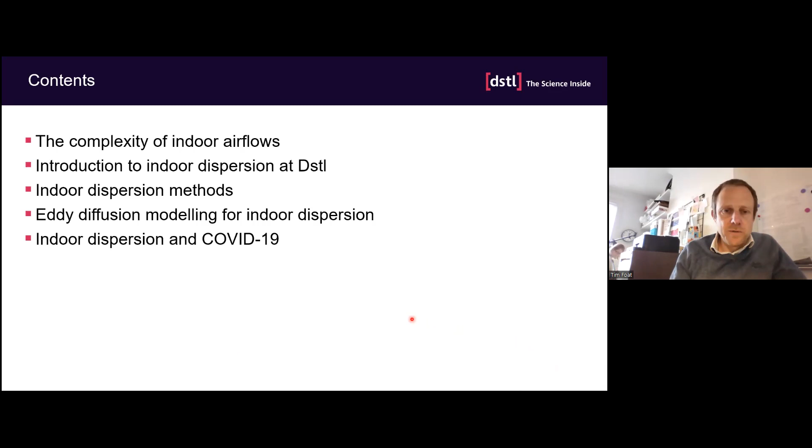So after the introduction to indoor dispersion at Dstl, I'm going to talk about the different indoor dispersion methods we use at Dstl. And then I'm going to focus on two examples. So a little bit on the eddy diffusion modelling for indoor dispersion, and then finally the second half of the talk on indoor dispersion and COVID-19. So I was going to start by explaining why indoor airflow is complex.

So indoor airflow is complex for a number of different reasons. And some of these are the flow in indoor space is often relatively weakly driven. So compared to outdoor flow, when you can have a strong dominant wind direction, often there's very weak drivers to the flow. And this could be the same in a mechanically ventilated space or a naturally ventilated space. And then second, you can have multiple flow directions. So in a naturally ventilated space, you can have two windows open, a window and a door, and you have flow coming from different directions. And even in a mechanically ventilated space, you're likely to be supplying air from a number of different directions.

And because of this weakly driven flow effect, the secondary drivers of the flow can be important, so the thermal effects can be significant. And all these factors together result in airflow that's nearly always unsteady and is typically turbulent. So I've used this little example here to try and show some of the complexity in the airflow. So this is a simple test case that was popularized by Nielsen in the 1990s, and we used it more recently to look at large eddy simulation.

So this room in our case was 9 meters long, 3 meters wide and 3 meters high. And air is supplied at the top left and is extracted at the bottom right. We had 10 air changes an hour, so the total volume of the room is refreshed 10 times every hour. And in our simulation, we released a tracer material on the bottom left part of the floor.

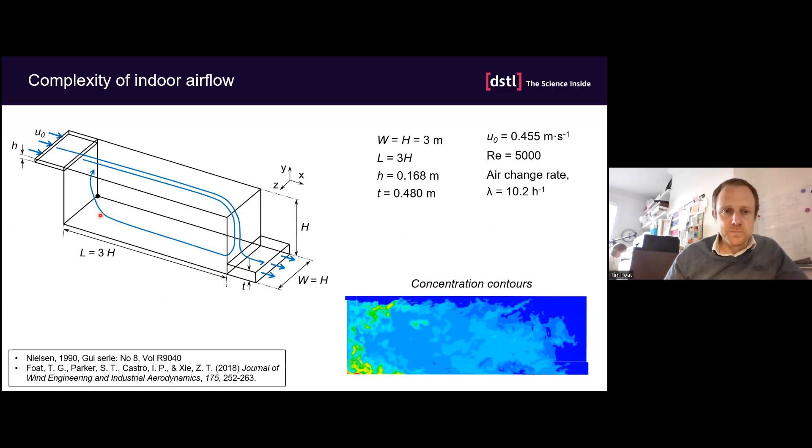So this animation shows results from our large eddy simulation CFD outputs, and it's showing normalized concentration. So the concentration is normalized to the source concentration, and this was on a vertical plane through the center of the room. So fresh air comes in here, and you can see the tracer being emitted from the source on the floor here. And this points towards some of the complexity.

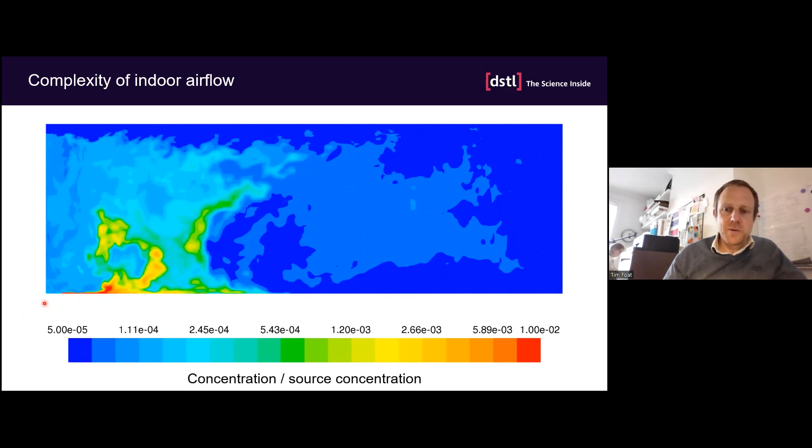So even in this case, which is actually a more simple ventilation than you get in most indoor spaces, you can see the complexity of the airflow, the turbulent airflow coming in. And the picture's even more complicated when you get the airflow dispersing the trace material that's on the floor. So it's hard to both measure and predict the complex behaviour that we see in these types of spaces. But one question to consider is, do we actually need to worry about this complexity, or can we simplify the problem? And quite often the answer to that question is yes.

So looking at another example now to point towards complexity, this was an experiment we did some years ago where we had a reasonably complex room. It was about 25 meters long. We released a tracer gas where this cross is shown here. This was released for 20 seconds. You can see the ventilation. There's vents running along the two sides of the ceiling. These are supply vents, and air is extracted from the back of the room. It's a reasonably low ventilation rate in this room, so it was about 4 air changes an hour. So the total volume of air is exchanged once every 15 minutes.

And what I'm showing here is the concentration measured at these 26 different gas sensors and how this changes with time. So you can see the first part of the experiment, up to 10 minutes, you end up with this very complex behavior. So regions of high concentration, low concentration, rapid changes. But then as you move to the later period, even though this room is complex and the airflow is complex, it tends towards a mixed state. So after 10 or so minutes, around about 1 air change in this case, you end up with reasonably uniform concentrations across the space.

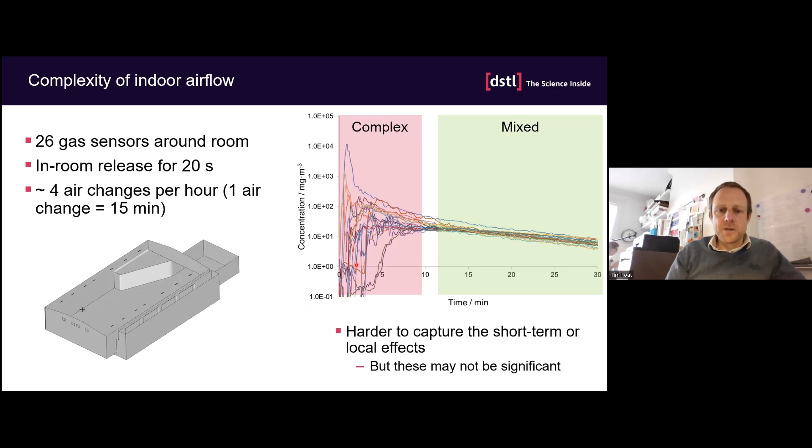So this early period is complex. So you can consider the airflow is complex either at early times or close to the source. So even at the mixed stage, if you had a continuous source, you can still end up with complex behavior close to the source. So it's harder to capture these short-term local effects, but it may be that these aren't significant depending on what the problem is you're trying to tackle.

So now looking a bit at indoor dispersion at Dstl. So we're primarily interested in the hazard from chemical and biological agents. And we're interested in buildings because these can be targets for terrorists, and people are confined within the space, and there's a lot less dilution than there is in the outside environment. So we're often required to understand the impacts of hazardous airborne material on indoor environments, to assess the risk and to figure out how we could protect the occupants.

And the things we're typically interested in are those short-term deliberate releases or accidental releases. The release could be in the indoor space, or it could be outdoors and be transferred to the indoor space. We're interested in gas and vapor materials and also the aerosol phase. And we typically look at the time-dependent concentration or the integrated dose. And as well as these chemical and biological agents, we're also interested in vapor transport for detection of explosives.

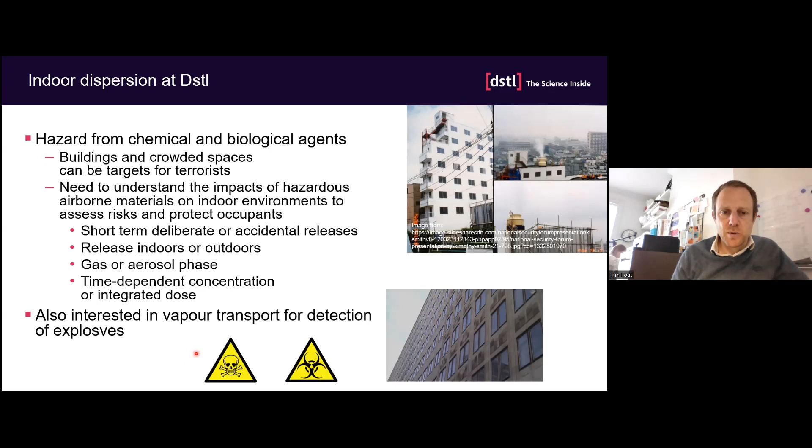So the environments we're interested in, we're interested in everything really from small-scale systems to complex networks. Our typical interest is non-residential buildings, and we're interested in everything from room scale to whole building scale. And these show some of the examples. So a large office complex or a small meeting room or a public space. We've also had an ongoing interest in transport, and this could be everything from a single vehicle to, recently, transmission of COVID on the London Underground, and this was a project called TRACK, which is Transport Risk Assessment for COVID Knowledge.

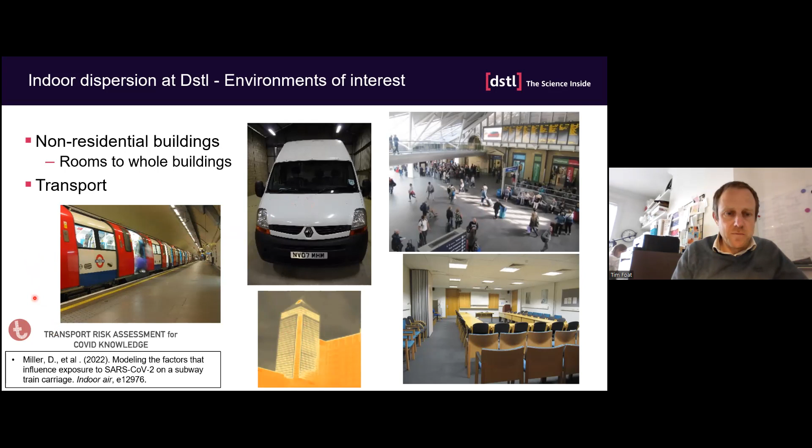So when you're thinking about indoor dispersion methods, you can split them broadly into 2 categories. So you can have specific approaches and general approaches. So the specific approaches are broadly, if you want to consider what's going on in a specific building or a specific scenario, these models are typically detailed, but they're very sensitive to change. If you change to a different scenario, a different building, you may get very different results. And it's sometimes difficult to base more general advice on this.

So the other end of the range is the more general type modelling. These models are normally coarser, but they're more robust, and these are more suitable for providing advice on. So the different indoor dispersion techniques support one or other of these approaches, or could match multiple of them.

So typically experiments or high resolution modelling, such as computational fluid dynamics modelling, are typically supporting this kind of specific advice, whereas single zone modelling and multi-zone modelling, which I'll talk about in a bit more detail shortly, typically support more of the general approach, and then other techniques span the two. So I'm going to move now through some of the different modelling methods and some experimental methods.

So the first one I'll introduce is well mixed modelling. Going back to the experiment we had before with the concentration time series, I said that even in this room, which is quite complex, after a short period of time, you end up with this kind of mixed condition. So we can apply what's called a well mixed model to this environment, which basically consists of an exponential rise in concentration followed by an exponential decay.

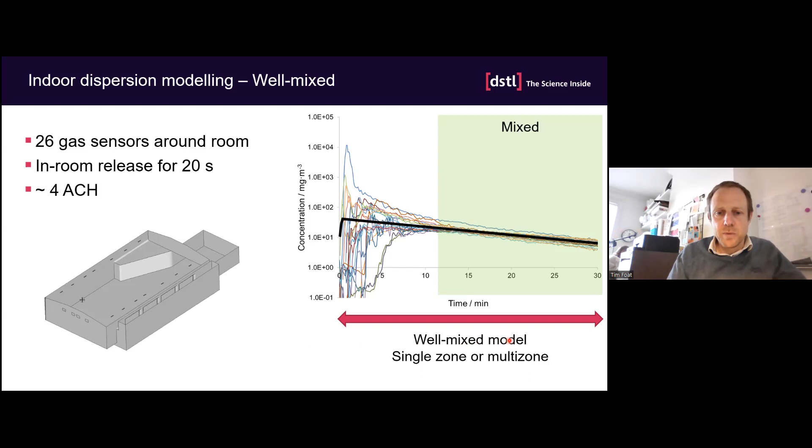This well mixed assumption can be used in a number of different techniques, and the two main ones we use are single zone modelling and multi-zone modelling. So single zone modelling, as I said, considers an average concentration in a room or even a simplified building. This is a simple representation. You just have a single volume, you have a flow rate of fresh air into the space, you've got a release rate into the space. These are the key parameters that drive this type of simple model.

You can take this to the next extent by including a ventilation system. So you could have contaminated air coming in from outside. You could perhaps have some filtration efficiency in the ventilation system, or you could have a recirculating ventilation system. And you could have loss terms, aerosol depositing to surfaces, or vapour sorbing to surfaces. We've been using these types of models for some time at Dstl, and they're very useful for carrying out rapid calculations and providing more general generic advice.

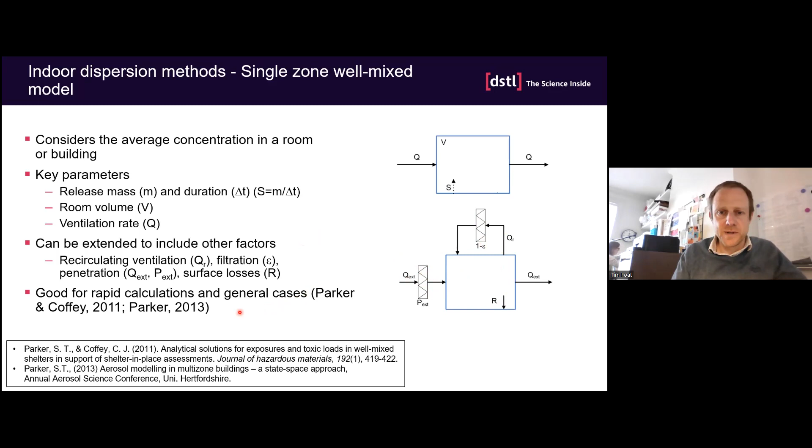Then the next level of complexity using this well mixed type of modelling is multi-zone modelling. For this, you can start looking at a whole floor of a building, or even a whole building. Here you have a number of separate well mixed spaces, and you have to define the connectivity between the different spaces. So here we've got a single storey of a building: lift shafts, the main office space, stairwells, and each one of these is a separate well mixed zone. As I say, you define the coupling between them.

You could represent a single storey of a building, or you could put these together and end up with a representation of a whole building. With multi-zone modelling, you can calculate the airflow and the dispersion. There's a number of third-party tools available, and the one we use primarily is CONTAM, which I believe was developed by NIST in the US. Extensive validation has been carried out for these techniques over the years.

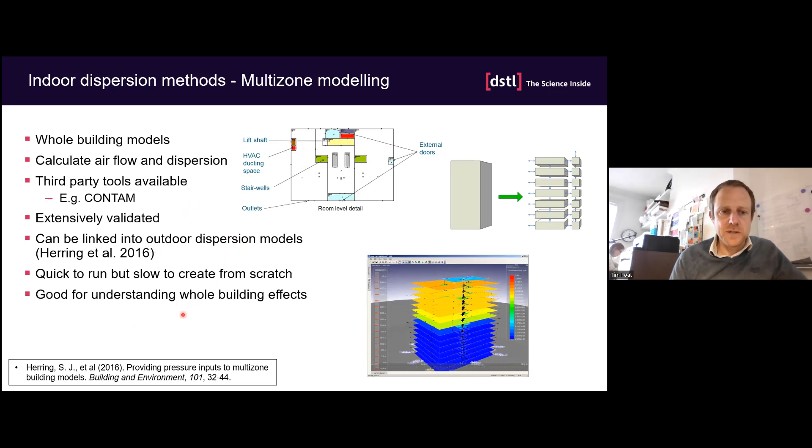And something we've looked at is linking this type of indoor model to an outdoor dispersion model. These models are very quick to run, but even though they're simple, they're reasonably complex to set up, as you can imagine, because you've got to define lots of spaces and the interconnectivity, but they're very good for understanding whole building effects. So the next level to take the well mixed modelling to is something called state space modelling.

So state space modeling is a method where you solve a system of coupled first order differential equations, and you can understand the dynamics of a more complex system. So the way we use it, we take the steady flow field from the multi-zone model, and then use a state space method to predict the dispersion of the material. And the approach we've used most often is producing these things called impact matrices.

And the advantage of these state space models is they are very quick running. So we can look at the effect of a release in any location from the release happening in any location. So in these impact matrices, the columns indicate the release location, and the rows indicate the impact location, so the kind of zone we're interested in. And we've got three examples here. So we've got a residential, a 3-story with an attic residential building. We've got an apartment complex, and then a kind of complex healthcare setting.

So in this plot here, we've got the release locations along the top here. That's showing the lower floor, the first floor, the attic. And then this is the impact location, so the attic down to the lower floor. And what you can see in these impact matrices, you can very quickly see that if a release happens in the lower floor, it's affecting all the floors up to the...

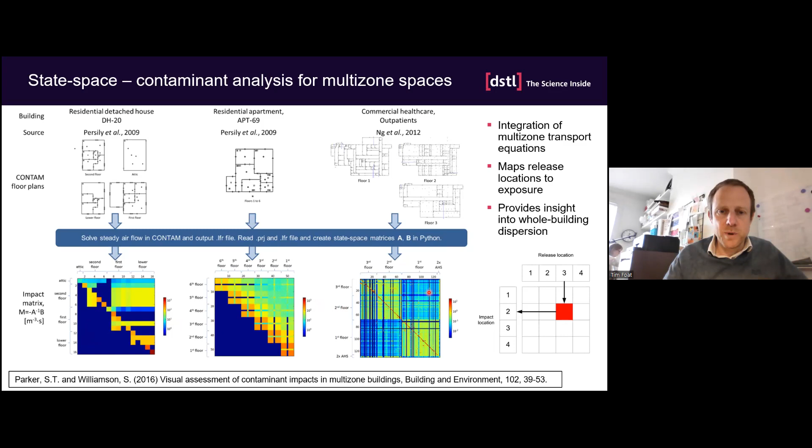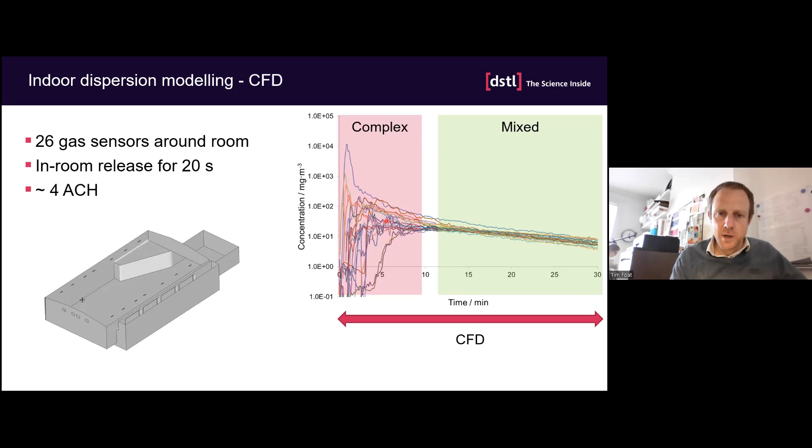So the next modeling technique I'm going to talk about is computational fluid dynamics. So in theory, CFD can predict what happens in the mixed phase, but also in the complex phase. But even with these high techniques, it's very difficult to predict the precise performance. Even these high resolution techniques would struggle to predict the full detail of these concentration time histories. So computational fluid dynamics works by solving the fundamental equations for fluid flow over many computational cells.

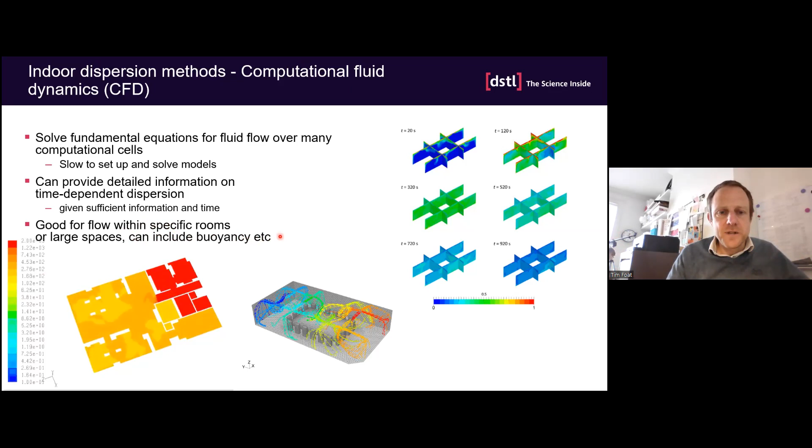And the biggest problem with CFD is it's very slow to set the models up and slow to run the models. But they can provide very detailed information on time-dependent dispersion, assuming you have sufficient time to build the models and analyze them. And they're very good for looking at flow within specific rooms and large spaces. So the well-mixed assumption, that the material mixes instantaneously across the space, holds when rooms are smaller or they're very well ventilated. So when you get to the large spaces, that well-mixed assumption falls down, and that's when the CFD models are most useful. And within CFD, you can also include more complex physics, so you can include buoyancy, for example.

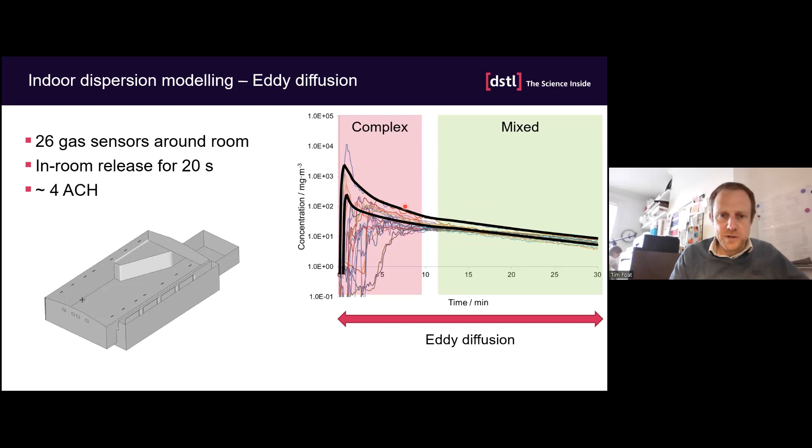So the next modeling technique I want to talk about is eddy diffusion. So eddy diffusion is something that sits between the well-mixed modeling and the CFD technique. It's based around simple analytical models that can be solved very quickly, but it predicts the spatial variation and the temporal variation in concentration. So if we look at our concentration time series here, an eddy diffusion model would capture the rising concentration and the decay, like the well-mixed model, but also captures some of this spatial variation.

So a bit more about eddy diffusion modeling. It's often impossible to build and run a full CFD model, and this may be because you haven't got the time available, or you don't have the detailed information about the geometry or the flow in the room. And so this eddy diffusion approach provides us with a simplified representation of spatial resolution.

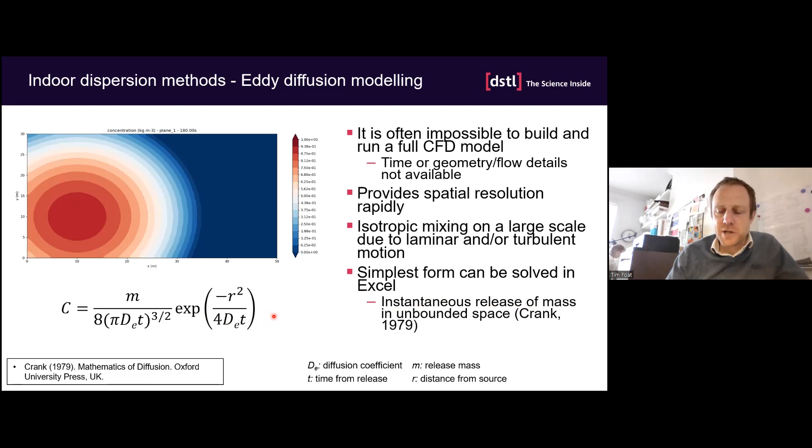So the turbulent diffusion coefficient, or the diffusion coefficient that represents this turbulent or laminar mixing, typically ranges from 10 to the minus 3 meters squared per second to 0.1 meters squared per second. So if you compare this to molecular diffusion, which is typically 10 to the minus 5 or 10 to the minus 6, this turbulent laminar mixing is much larger than the molecular mixing.

So people have taken these eddy diffusion models over the years and extended them. So Drivas in 1996 produced some models, as well. Other people have done similar things, produced models that allow representation of your source in a confined space, and this is done by showing image sources. And this animation here shows the effect that as the cloud of material moves towards the walls, you get this image source reflection effect.

Others, such as Cheng et al. in 2011, extended the model to include a decay term. So this provides a global decay of the released material.

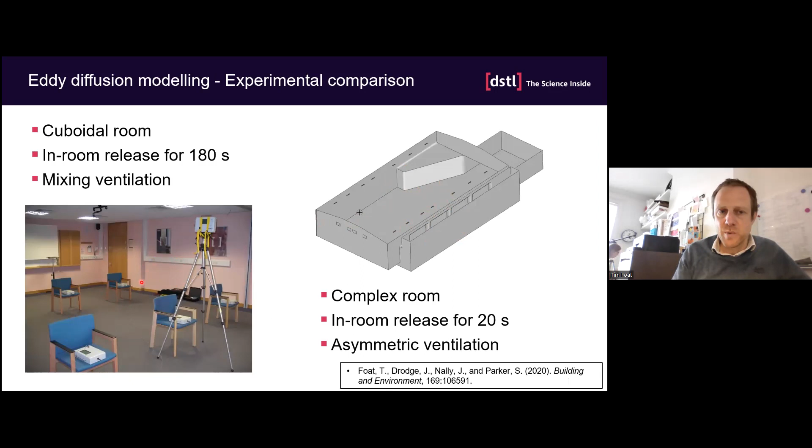So we've done some comparisons at Dstl, comparing the eddy diffusion models to some experimental data sets. So this is the complex room I showed earlier, with this asymmetric ventilation, and this is a much simpler test case. So this is a cuboidal meeting room, with a volume of about 250 meters cubed. There was a release of tracer gas in the corner of the room for 180 seconds. This room has mixing ventilation and is pretty well mixed. It's got an air change rate of about 10 air changes an hour, I think.

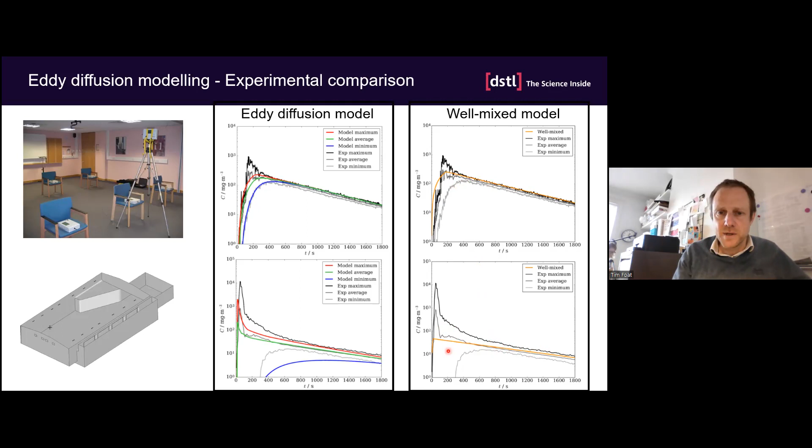And in the complex space, again, it's doing pretty well in the later phase, but it is under and over predicting in the early phase. So these eddy diffusion models are completely dependent on the diffusion coefficient. It's this diffusion coefficient DE here which drives the rate at which material is mixed across the space.

And historically there's been very limited experimental data for buildings. So some people have tried to produce relationships to define this. So Cheng et al. in 2011 produced an empirical relationship based on some naturally ventilated spaces, and he showed that the diffusion coefficient was a function of the air change rate of the room and the volume. And Drivas and Karlsson in the 90s produced turbulent kinetic energy balance models. So they look at the rate at which turbulent kinetic energy is being produced and dissipated, and they come up with quite a nice relationship.

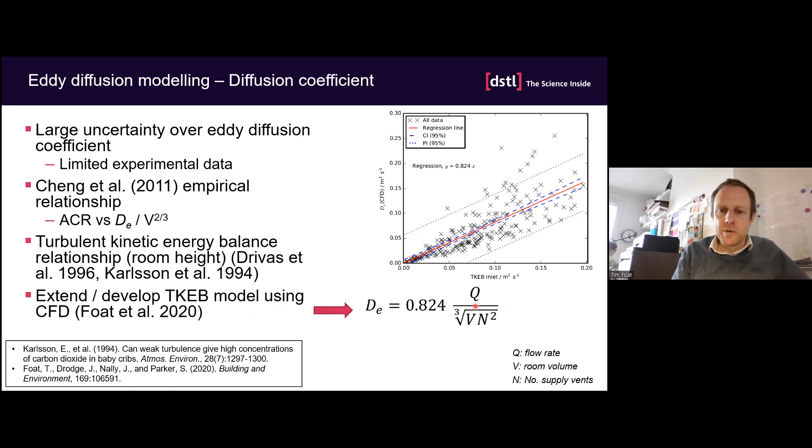And we took this a step further in 2020, and we used a set of CFD models. So what is shown here, each one of these crosses was a CFD model; we automated the CFD setup. So we ran 250 different CFD models of rooms, different shapes and sizes. And we showed that by using this TKEB model, but setting the characteristic length scale to the size of the inlet vent, as opposed to the room height, which is what Drivas and Karlsson had done, you could simplify the relationship. So then the diffusion coefficient is just a function of the fresh air flow rate in the room, the total flow rate in the room, the volume of the room, and the number of air vents.

So we're also supporting a couple of studies looking at trying to further improve our understanding of how the turbulent diffusion coefficient varies in realistic spaces. So the first one is some work being carried out at Southampton University by Dr. Desmond Lim and Dr. Christina Vanderwel. And their primary interest is the effect that people movement has on the mixing. So they're using the PLIF technique, planar laser-induced fluorescence, and the PIV technique, particle image velocimetry.

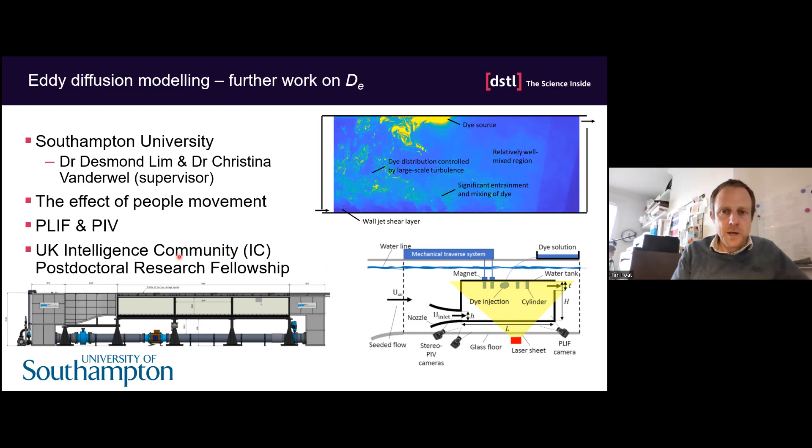They've produced a model that represents a simple space, and this is the same kind of space as shown earlier from the Nielsen 1990 test case. And they've built their model so they can move these cylinders around, which will represent the people movement. They've put this model in a water tunnel at Southampton, and they're going to try and study how the diffusion coefficient changes in this space. This work's funded by the UK Intelligence Community Postdoctoral Research Fellowship.

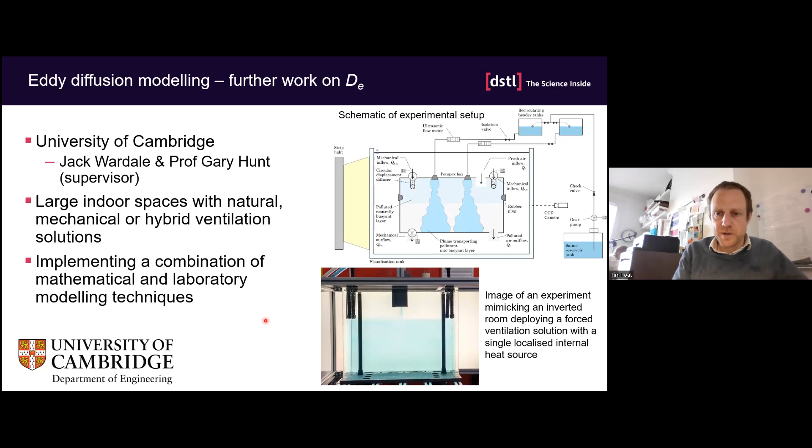And the second study is at the University of Cambridge, and this is being carried out by PhD student Jack Wardale and supervised by Professor Gary Hunt. So Jack's primary interest is large indoor spaces that are either naturally ventilated, mechanically ventilated, or of a hybrid ventilation. And they've got a static water tank set up, and they've got a combination of mathematical techniques and laboratory techniques to understand how this diffusion coefficient changes.

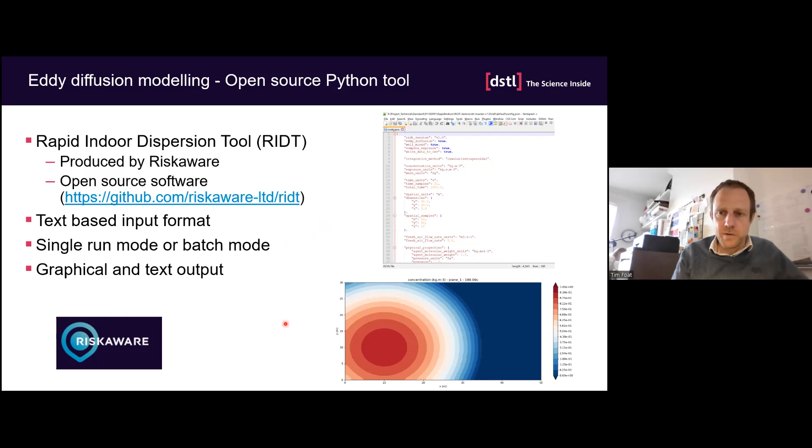So finally, on the methodology, I'm going to talk just briefly, one slide, on the experimental tracer techniques. So typically, in an experimental tracer dispersion experiment, we'd have a controlled release of the material. This could be a tracer gas or aerosol. We measure the concentrations at multiple locations around the space. And these types of experiments are very useful for us to validate the modeling, but they can also help underpin the development of the models. And the experiments can also be used directly to carry out hazard assessments.

But the big problem with the experiments is that they can be very expensive, and they only really provide measurements for a specific location and condition. So it's more the specific end of the problem rather than the general end. And also it's very hard to monitor large spaces. So if you were interested in a large public space, such as a station concourse, it's very hard to instrument that space. And also when we're looking at tracer gases, the tracer gas concentrations are a secondary effect. Ideally, we'd know how the air is moving around the space, and then we'd like to know how the dispersion is.

So the tracer dispersion by itself isn't necessarily always ideal for validating models. So for the rest of the talk, I'm going to talk about this project where we've been using CFD indoor dispersion to look at the transmission of COVID.

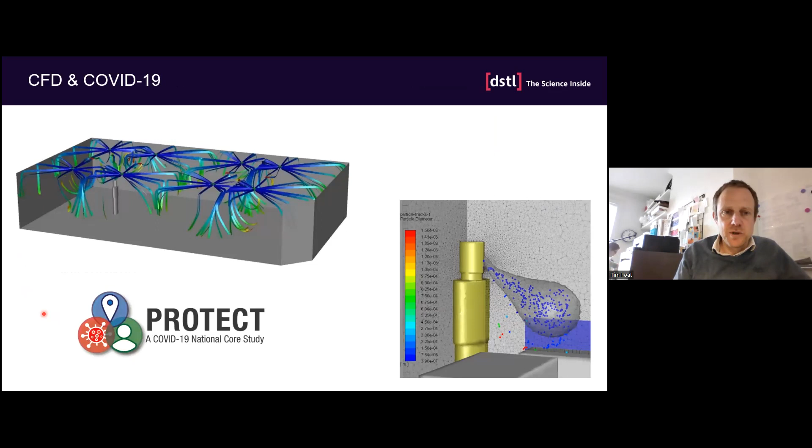So this was a work package within the NCS Protect project. The NCS Protect project is a partnership between 21 UK academic and research institutes. And the aim of the work was to improve our understanding of how SARS-CoV-2 is transmitted from person to person and how this varies in different settings and environments.

The aim of our specific work package was to understand and characterise respiratory droplet dispersal in these indoor spaces. And this work we carried out in partnership with the Health and Safety Executive and also the University of Leeds. There's also some colleagues at Dstl who have been supporting the NCS Protect project in other areas.

So some colleagues have been using the QMRA technique, which is quantitative microbial risk assessment modelling, to assess potential factors that influence disease transmission in indoor spaces. And other colleagues have been looking at touch transfer, so how efficiently COVID is transmitted to and from surfaces. For our work, we were particularly interested in how temperature and humidity affect this airborne exposure.

So the test scenario we used was the one I've talked about earlier, this simple meeting room that has mixing ventilation; air is supplied and extracted from the ceiling. In our model we had an air change rate of 5 per hour. There was no recirculation within the ventilation system.

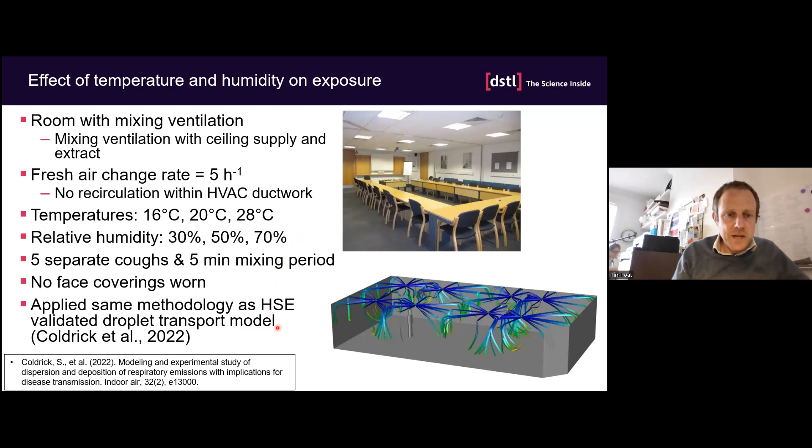And we applied the same methodology that had been previously developed by HSE and is reported in this paper by Coldrick et al. In this previous paper, their methodology was validated using experimental data from Public Health England, now called the Health Security Agency. So in our model, the person coughs into the space, so that the cough exhalation introduces a number of droplets into the room.

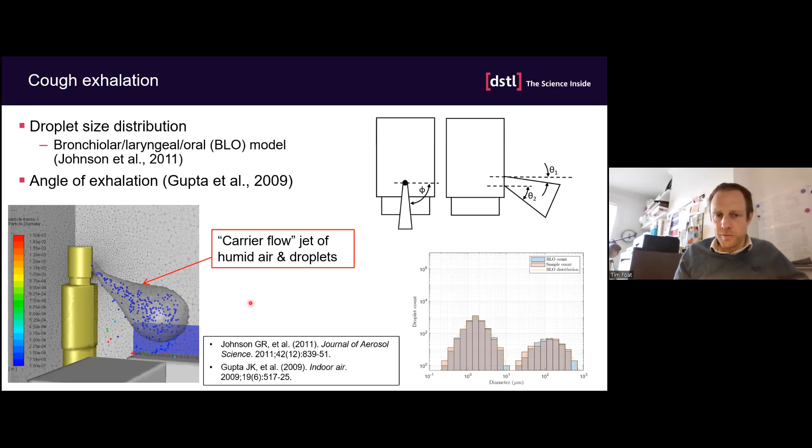And then the angle at which the person coughs into the room and the velocity of the cough was based on some work by Gupta et al from 2009. So this person coughs into the room, and their exhalation, this cough carrier flow jet, contains humid air and droplets.

Within our model, we modelled the thermal effects from the body, heat from the body and the exhaled air. The turbulence was represented using the K-Omega SST model, which is a standard model used for indoor airflows. We had 25 watts per square metre heat from the body. We only represented the convective heat flux and not the radiative flux.

To model the droplet transport, we used the Lagrangian particle tracking model. This was a fully coupled model, so the carrier flow imparts momentum to the particles or droplets and vice versa. Our droplets evaporate with time. The droplets were represented as water droplets, but with a non-volatile core. So the idea is the water droplets can evaporate till they get down to this solid core.

And we did previously run some of our models with a more complex droplet, where the vapor pressure of the droplet was based on the concentrations of the salts, etc., within the droplets. But we chose to simplify the representation here to enable us to run the models more quickly and model more scenarios. Then the number of viral RNA copies within each droplet was based on the viral load in the respiratory fluid and the Poisson distribution.

So this little animation just shows an example of the person coughing; the cough lasts 0.4 seconds. This shows the droplets coloured by diameter.

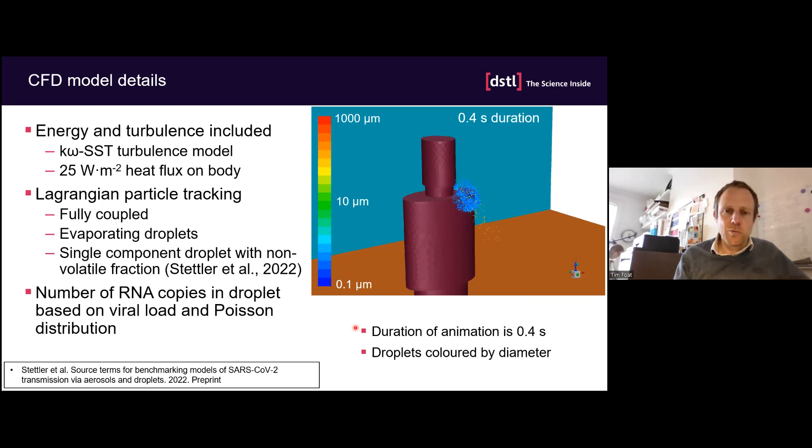So you can maybe just about see the larger droplets are fired out at the front of the cough jet, but quickly settle out, whereas the smaller droplets are more rapidly slowed by the static air in the room.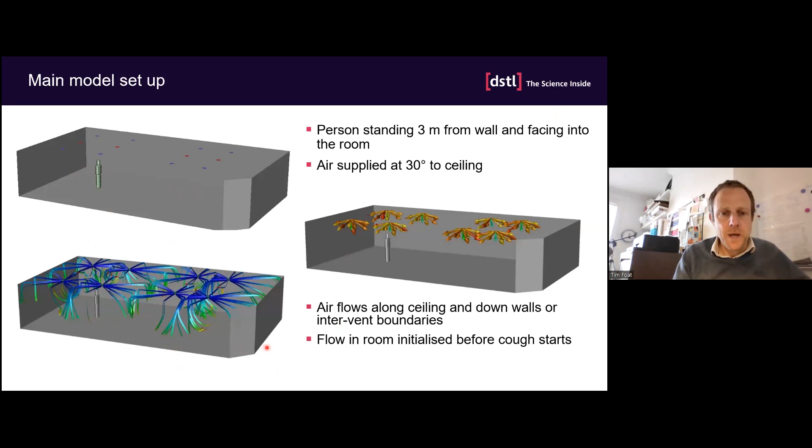So within the model, the person was standing 3 meters from one end of the room, and they were coughing down the long axis of the room. The airflow was supplied from the vents in the ceiling, louvered vents, and these louvered vents supply air at 30 degrees to the ceiling. And this forces the air to travel along the ceiling and down the walls, or the two jets meet at the intervent boundaries. And the flow is initialized in the room before the coughing starts.

I've just got some example output from our models here. So the first set of images here show the particle tracks. So this shows the tracks of individual droplets as they move into the room, and they dry down to become particles. I'm showing the droplets here. We split the data into 3 core size bins. So the first set of these green particle tracks are droplets less than or equal to 20 microns, and this is initial wet diameter. The middle set of data is droplets between 20 and 100 microns, and the third set is the droplets greater than 100 microns.

So because they've got this non-volatile core, they very rapidly dry down to this solid core, and the final diameter ends up as 0.23 times the initial diameter. So looking at this data first for the small droplets, it's very clear to see that the small droplets remain airborne and spread across almost the entire space. It's interesting, actually, there's a small part to the left of the room where, just because of the ventilation makeup, it's not fully mixing.

The larger droplets aren't that affected by the room airflow and deposit out very quickly, but the intermediate droplets are perhaps the most interesting ones. So these start out up to 100 microns in diameter, but they dry quite quickly to the smaller size, and this allows them in many cases to remain airborne. So you can see here, as the cough jet, some of them do deposit out, but other ones mix up into the airflow in the room, or of course are caught in the thermal plume around the person and are carried up into the space. These blue rectangles on the top of this image represent the room vents.

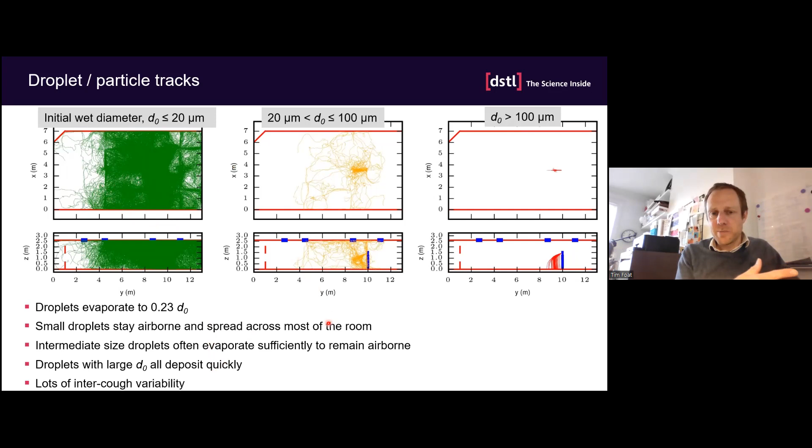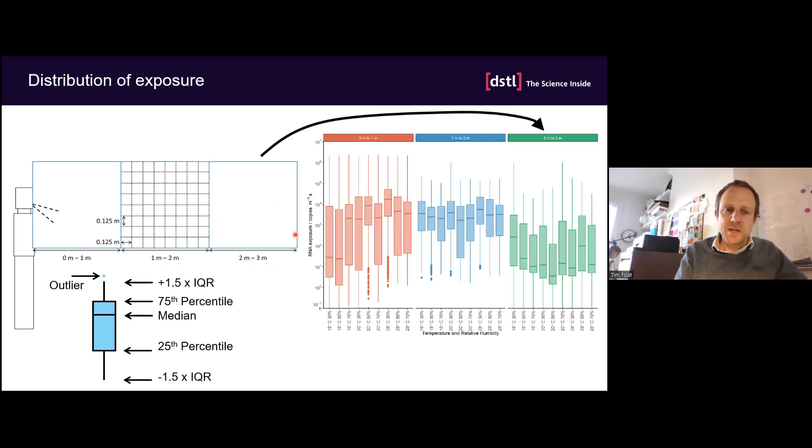And then by the third volume, nearly all the larger droplets and the larger intermediate sizes have fallen out, and the air is being diluted as well. So we're ending up with lower exposures in this third volume. Then what we've done is broken down the exposure into the distance from the person, the temperature and the humidity. First, the distance from the person: we've got the three regions again, the first volume up to 1 meter, the second up to 2 meters, and the third up to 3 meters.

And you can see here that there's no statistically significant decrease in the median as you move from the first volume to the second volume. So here it's showing 1 meter social distancing would have very little effect in this case. But as you move to the third volume, there is a significant decrease in the median exposure, and the whole distribution is shifted down. In fact, we're getting a factor of 200 reduction in exposure.

And I should say that these exposures are based on 2 people talking face to face. If you had other people in the meeting room, or people off to the side of each other, you'd end up with a more complex picture. Then we've looked at the effect of humidity.

So what we're showing here is we've got the 3 humidities. So we've got 3 volumes again, the 3 different humidities, 30 to 70%. And what we showed here is we get a statistically significant decrease in the exposure as the relative humidity is increased. But this effect is very small in absolute or relative terms. So you can see there's very little actual decrease in this exposure. But the overall effect is what's been reported before.

So for a number of years, starting with Wells in 1934, people have produced simple analytical models, typically of a single droplet, and they showed that they were seeing these effects in these simple droplet models. And people have done CFD as well, where they've represented a number of these processes, and we're showing a similar thing. But what we've tried to do in our modelling is do a more realistic representation of all the complexity in the airflow.

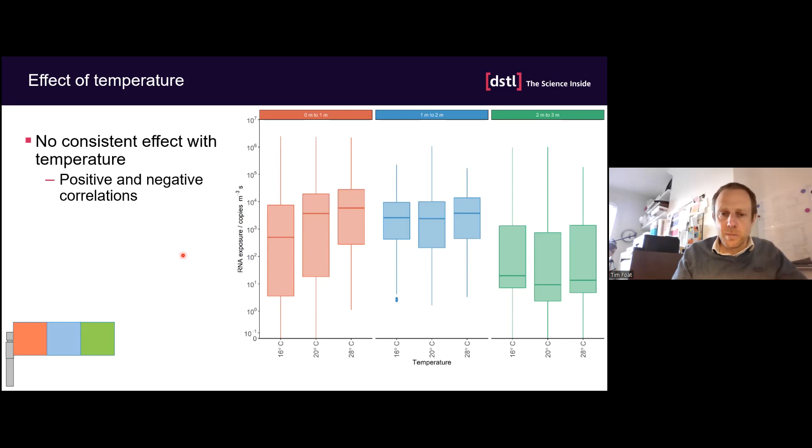And then finally, looking at temperatures. So interestingly here, we were getting a mixed effect with temperature. So in this first volume, as you increase the temperature, you're getting an increase in exposure. But if you look at this third volume, an increase in temperature here resulted in a decrease in exposure. So we were getting these positive and negative correlations. So this was a result we weren't expecting, but it shows that any effect that temperature is having on the droplets is being overridden by the complex turbulence and air movement in the space.

So to conclude this NCS CFD study, our results have shown the importance of the standard government guidance, which is the importance of wearing face coverings, to reduce the amount of droplets that are exhaled and reduce the amount that are inhaled, and maintaining social distancing. Both these should help to reduce the inhaled dose. And then the conclusions of our work,

so I'll just go back to show, yes, the point I wanted to make here is that if we increase the relative humidity, the droplets evaporate less and they fall out of the air. So this reduces the airborne exposure. But the opposite effect of this is if we're reducing the airborne exposure, we're increasing the deposited material. So if someone was sitting or standing by a desk in your space, if we're reducing the airborne exposure, we're promoting the deposition. So you end up with more deposition on the surface. So this could have a negative effect, that it could increase the fomite transmission.

And people have also carried out some studies to look at the effect of relative humidity on fomite transmission. And my understanding is that relative humidity can increase the efficiency with which material is removed from a surface. So what we're doing here is very much only looking at the fluid dynamics effect of the transmission. So the other effects we haven't considered, it's possible that temperature and humidity could affect the physiology of both the infected person and the susceptible person. So as I say, this is very much a fluid dynamics effect only.